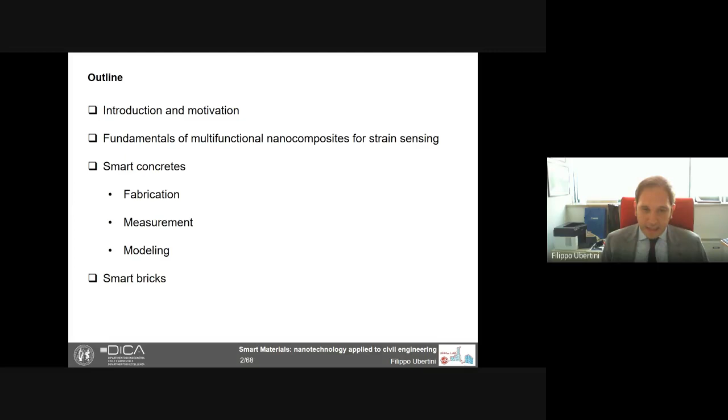So the motivation, of course, is that we all know that our structures and infrastructure are exposed to several hazards, including natural disasters, degradation, fatigue, collisions, and so on.

And what we all want to do as structural engineers is find ways of detecting criticalities well before they reach major failures or collapses. We want to get an effective way to do preventive maintenance and never reach the minimum acceptable threshold in terms of structural performance.

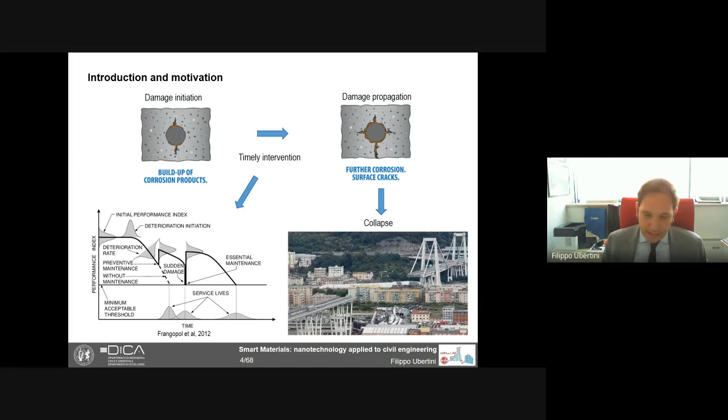So it's very important that we detect, locate, and quantify the criticalities well before any major collapse, as unfortunately happened even in recent times, including in Italy.

So there are about two approaches to do that. One is non-destructive evaluation, and the other one is SHM.

With my research group at University of Perugia in Italy, I would say that we are mostly working on the SHM framework, which means to acquire data continuously from a structure and then apply different techniques of data science to detect anomalies and possibly locate and quantify the criticality, and then have an efficient diagnosis, which means that we can take an engineering-based decision on what to do with our structure.

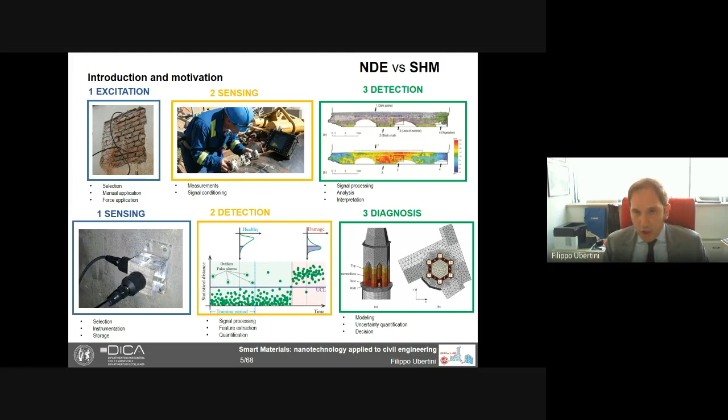But then in this field, we have some problems that we have to consider. With my research group, essentially, we have two research lines in SHM. One is the one I'm presenting you today, basically, that is related to the development of smart multifunctional structural materials.

And the other track is developing algorithms for SHM using more traditional sensors and working on the algorithms like doing vibration-based SHM, artificial intelligence, data science, and so forth. Today, I will talk about smart materials, as I've said.

So why do we need to include smart materials? Basically, because we have a big issue that sensors that we use in SHM, they do not measure damage. Damage is a change in material or geometric properties that adversely affects the structural performance, but of course, it's something that cannot be directly measured.

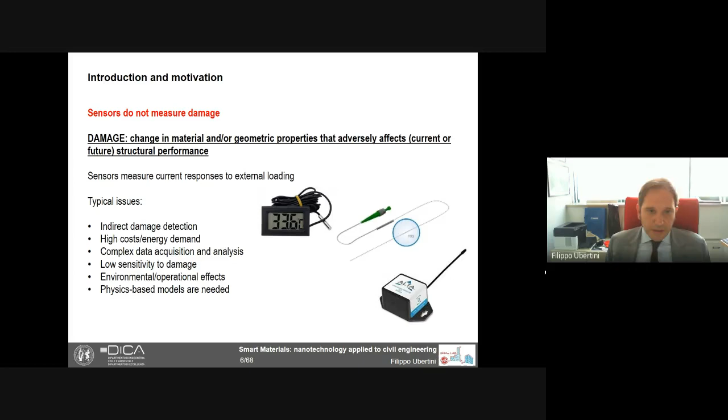Typical issues we have are also related to high costs, energy demand, complex data acquisition and analysis, environmental effects that have to be removed from the features that we use for damage identification, and then we need to include physics into our models for taking decisions.

So why multifunctional materials? Because what we want is defining structural materials that generate a more direct response to a damage. We want the material itself to alert when there is a damage. In doing it this way, the sensors of an SHM system are basically naturally integrated in the structure because the material itself becomes a sensor, a distributed sensor.

To do that, what we have to do is look at the micro or even the nanostructure of the material and engineer that structure in such a way to add novel functionalities and provide the material with an enhanced performance.

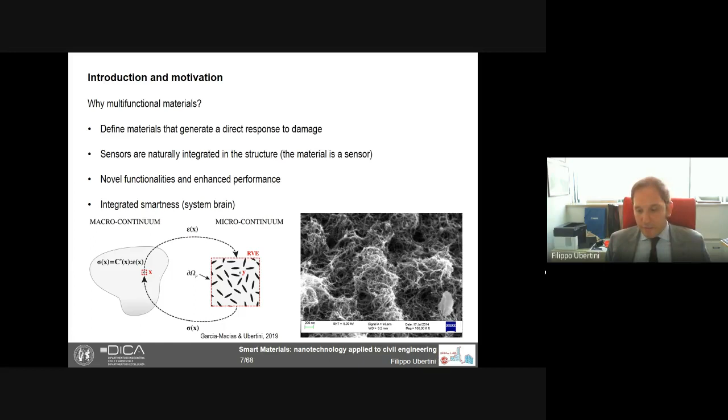An example of doing that is diluting conductive nanoinclusions or nanofibers into a non-conductive matrix, for example, using carbon nanotubes, as you see in the bottom right picture from SEM inspection, and as I will show you later on in the presentation. So a little bit of physics that we need to recall.

It's very simple. We just need to go back to the equation of monodimensional conductors to understand most of the work that I will show you. So basically, if we have a conductor, its electrical resistance is the resistivity of the material times the length divided by the cross section.

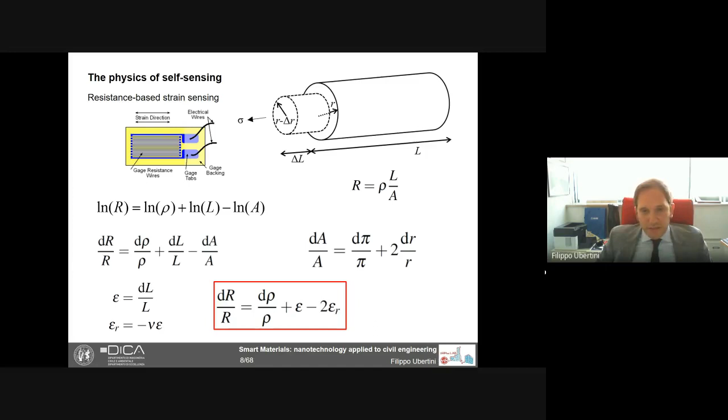If this conductor is under monodimensional stress and strain, we have a relative change in resistance that is basically the sum of the relative change in resistivity plus the axial strain minus twice the transverse strain.

If the material is a linear elastic material, then we can write this equation in the form that the relative change in resistance is actually proportional to the strain through the factor lambda, called the gauge factor, that is 1 plus 2 times the Poisson coefficient plus the relative change in resistivity per unit strain.

What happens typically in electric resistive strain gauges is that this last term is not very important. So typically electric strain gauges have a gauge factor of about 2.1, where if the Poisson coefficient is close to 0.5, it means the last term in the right-hand side of the equation is about 0.1.

The idea in piezoresistive materials, in smart materials that I will show you, is trying to maximize this last term associated with what's called the piezoresistive effect, and getting gauge factors much bigger than 2 or 2 point something, but that can reach values up to hundreds or even thousands.

How to do that is to create a conductive network of nano inclusions, nanofibers within the matrix, such that an applied strain produces a change in the interactions between the nanoparticles, which means a change in the overall resistivity of the material.

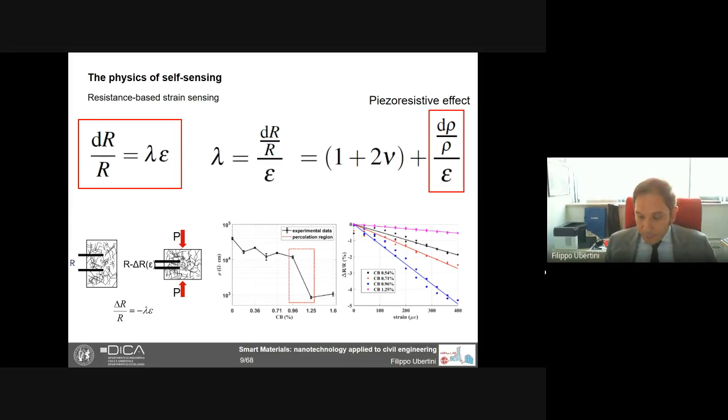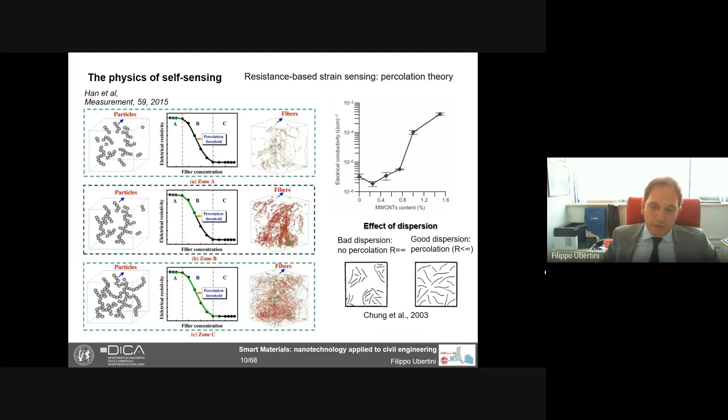What's very important to stress is also that we need a very good dispersion of the nanotubes if we want to achieve such percolation. This is very critical, as we will see later on.

So let's come to the focus of the work. Most of the things I will show you are referring to smart concretes.

What we call smart concretes are essentially cement-based materials that can be paste, mortar, or concrete, so with or without aggregates, that are made smart, strain sensing, self-sensing through the addition of different nano-inclusions. The work I will show you is referring to the use of multi-wall carbon nanotubes.

One big difficulty in dispersing nanotubes in concrete is that we need to disperse the nanotubes in water first, and then add cement and aggregate and so forth. To disperse the nanotubes in water, we need a lot of attention, and typically we need sonication and sometimes magnetic stirring. This, of course, is not suitable for large-scale production.

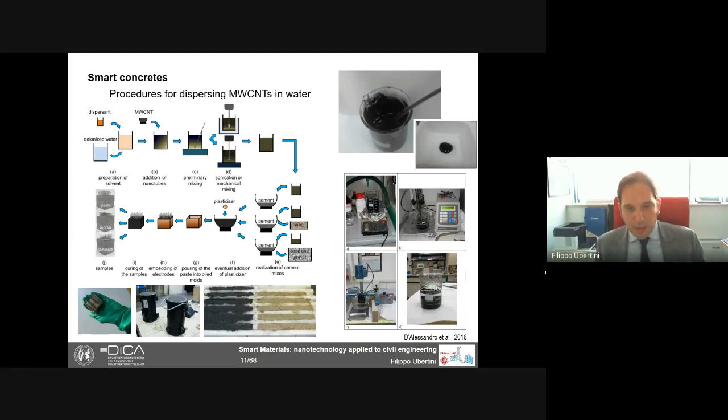Here you see some sketches, some figures from our lab, and note the difference in color between a plain cement paste and a cement paste that has just 1% of multi-wall carbon nanotubes with respect to the weight of cement. The change in color is quite strong.

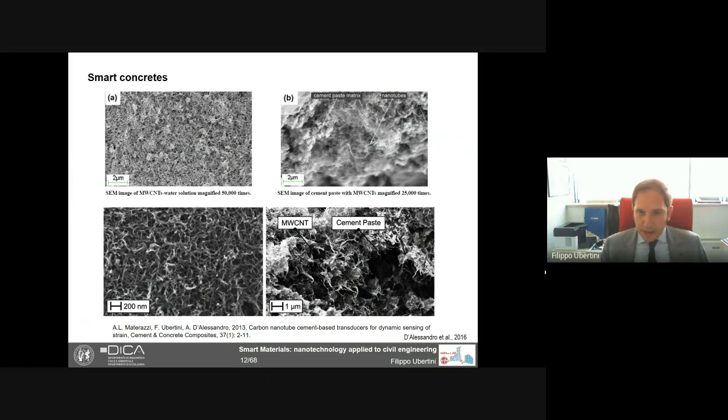Here you see some scanning electron microscopy images of nanotubes after dispersion in water, after water evaporation, as well as in the hardened cement matrix, where you see the nanotubes form this sort of very nice spider network that creates the conductive ways through the material.

The reason why we use multi-wall carbon nanotubes is because they have excellent mechanical and electrical properties. They have very high aspect ratios, and they have a small size. Essentially, nanotubes are cylinders of carbon atoms, one inside the other.

The multi-wall carbon nanotubes we use have a cost that is absolutely compatible with an application in civil engineering. Of course, not in large amounts, but in small amounts, in critical situations and critical locations of a structure, the cost is compatible and competitive with that of a traditional sensor.

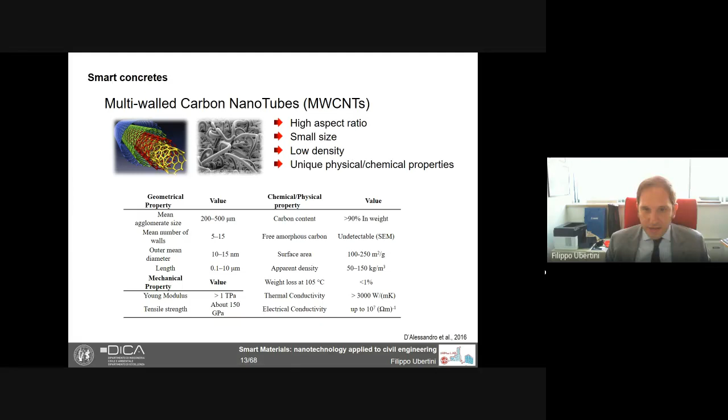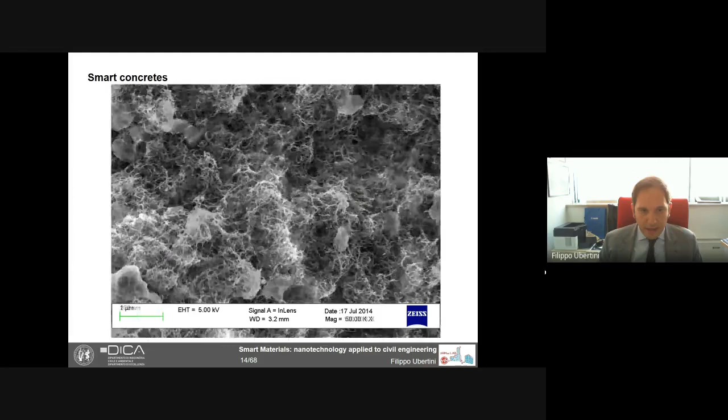Here you see some of the properties of the nanotubes, where I point your attention to the very high tensile strength and the very high electrical conductivity. Here you see some pictures of nanotubes at increasing magnification, where at the bottom left you have the dimension scale, giving you a feeling of how small these very thin wires of carbon atoms are.

So let's go to measurements. To measure the electrical resistivity of smart concretes, from the literature we have two approaches: the two-probe method and the four-probe method. Both are direct current approaches.

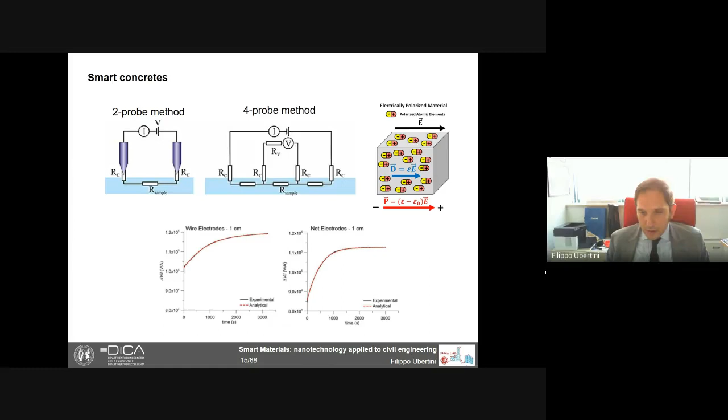Of course, the alternative is to do AC, alternating current, but then we cannot really go to multi-channel reading. So one main contribution we made in the work by Downey and co-authors was proposing a biphasic direct current measurement that keeps the advantages of DC but removes the polarization issue, so we can do multi-channel reading without any polarization problem.

The way we do this is by applying the voltage input in the form of a square wave, with plus or minus, for example, 2.5 volts in a single period of the square wave. Then for every period of the square wave, we just take one sample, one reading.

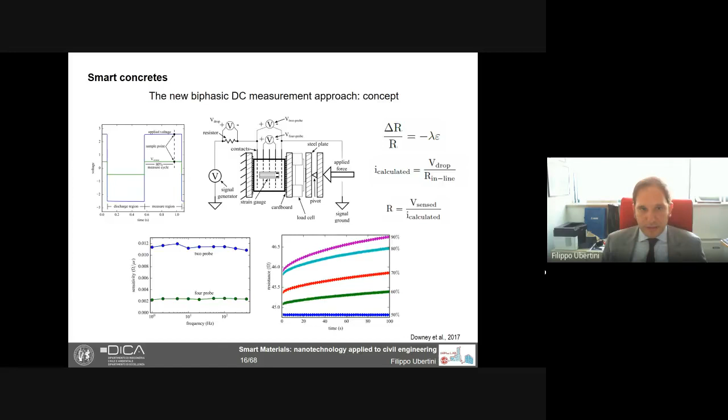So we know how to fabricate these materials, and we know how to measure them. Now let's see what happens if we apply a strain.

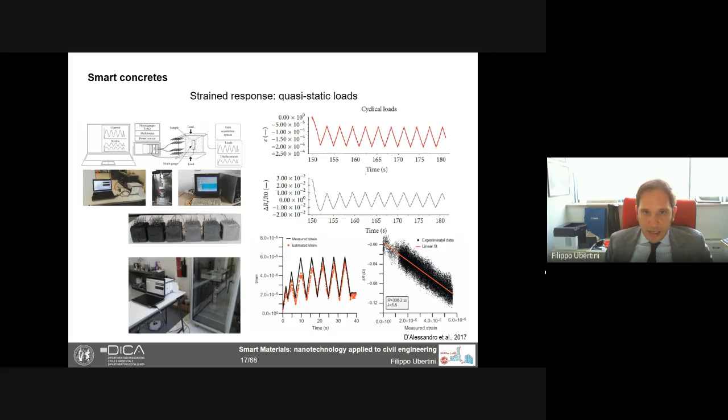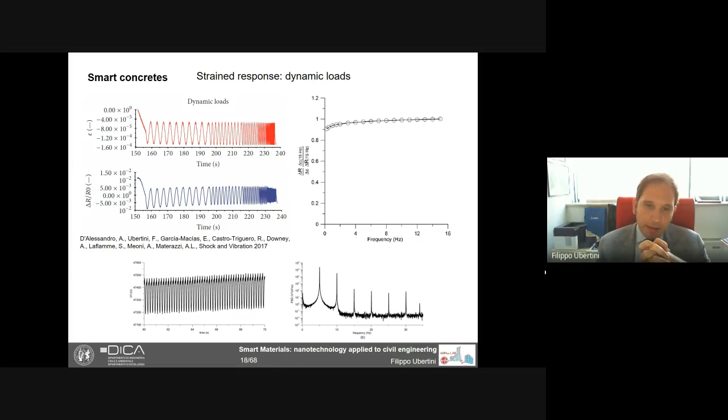Another notable aspect of these sensors is that the response to a harmonic mechanical load is periodic, but not harmonic—it has superharmonic components, as you see in the bottom right diagram of this slide. This, of course, is a drawback of these sensors that we will discuss later on.

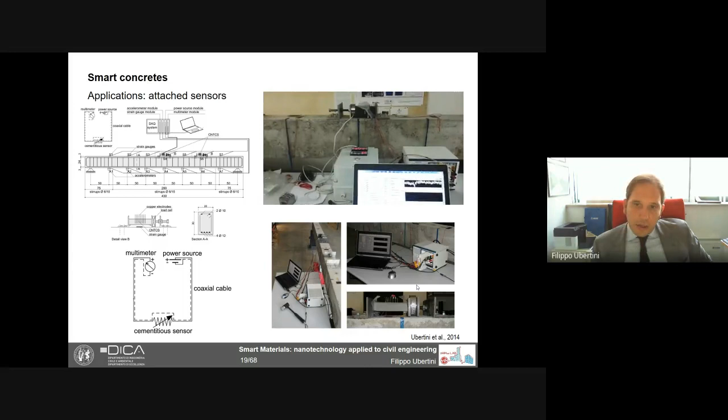Okay, let's go and analyze this signal. Actually, the video you have seen was not referring to the sensor we used for the paper, but in any case, it was very similar.

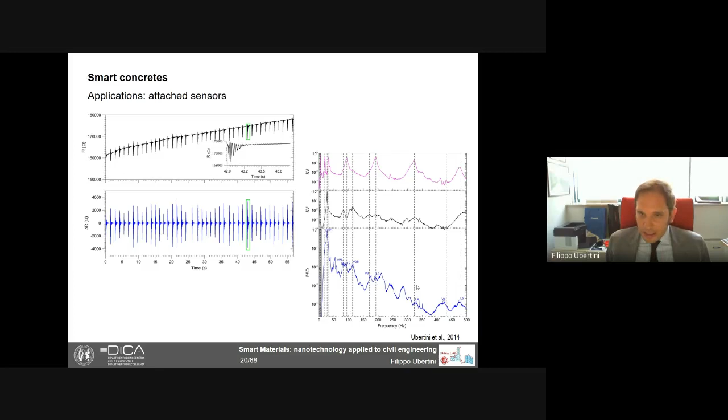But then if you compare the power spectral density of the blue signal in the bottom right image with respect to the singular values of the accelerometers attached onto the beam - with purple the lateral accelerometers, and with black line the vertical accelerometers - you see that all vertical peaks present in the singular value plot of the accelerometers are also present in the power spectrum of the smart sensor, the cement-based sensors with nanotubes. So what we get here, and the first leading mode is quite evident, is that using these sensors we can actually identify natural frequencies of structures.

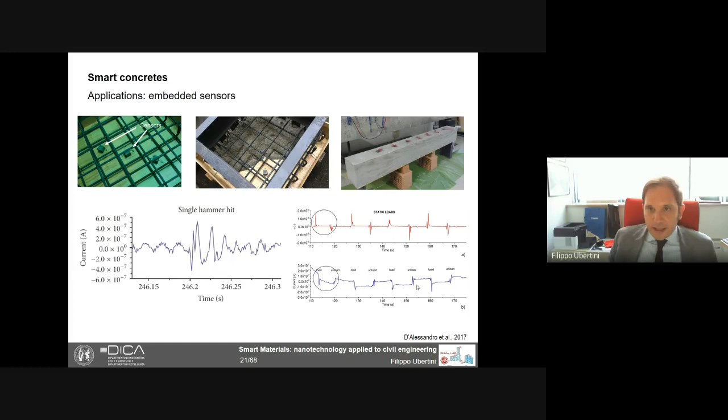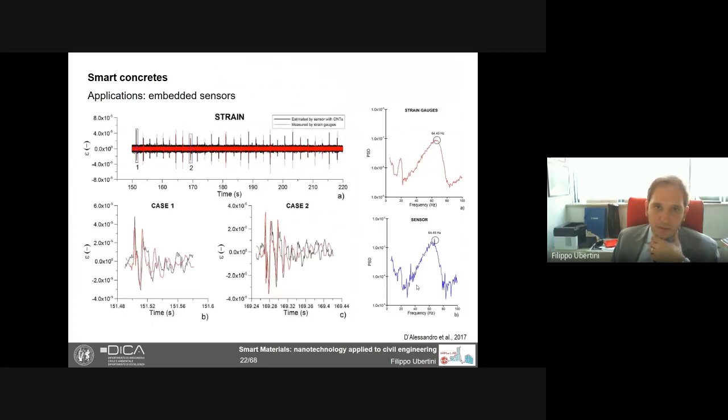If we do dynamic measurements with the hammer, we get a good agreement between the sensor in black and the strain gauges in red, and we can verify that the leading peak of the first mode is actually well detected by the smart sensors. All these papers are cited in these slides, and most of them are with Dr. D'Alessandro as the main author.

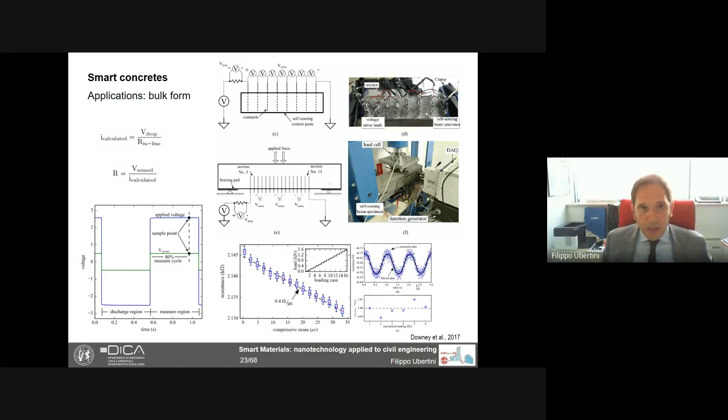Here you see the results from the specimen on the top left, in terms of resistance along the specimen, shown by the blue line in the bottom left image. The two outer contacts have larger resistance, but that's because of boundary conditions in the diffusion problem of the electrical problem. In the internal electrodes, we more or less have the same resistance, so the material is more or less homogeneous, and these values do not change in time unless there is damage or something like this.

So here instead you see the results of the application to the beam. Going back to the previous slide, you see on the right there is a beam with reinforcement, only longitudinal reinforcement, no shear reinforcement, and this beam is fully made of cement paste with nanotubes. We have electrodes all through the beam, and the beam is simply supported. We do something in between a 4-point bending and a 3-point bending test, let's say it's a 3-point bending test.

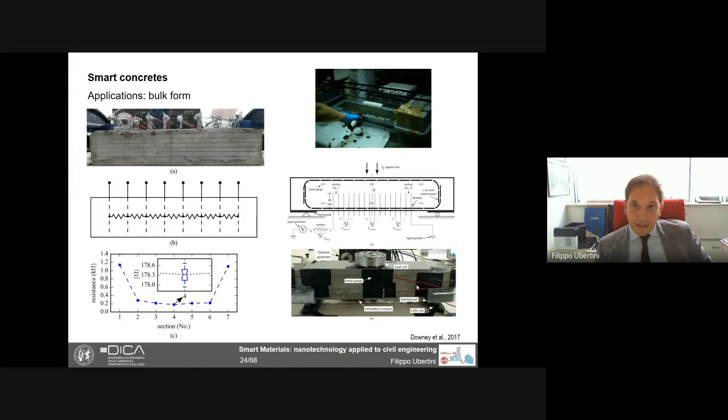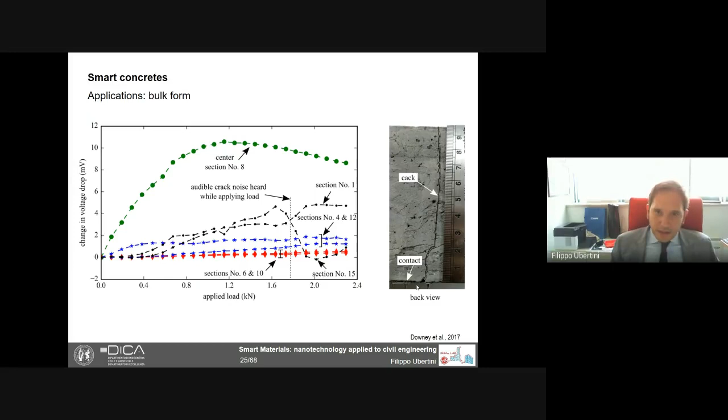The third thing you should notice is that at a certain point, around 1.6 kilonewton, there was a shear crack forming out of the electrodes. Section number 1 and section number 15 show opposite behavior—one was increasing in voltage drop, the other decreasing. For sure we have some bifurcation, some dramatic change in the electrical behavior of this section, and we will see later that this is actually associated with the damage, which we can predict with a numerical simulation.

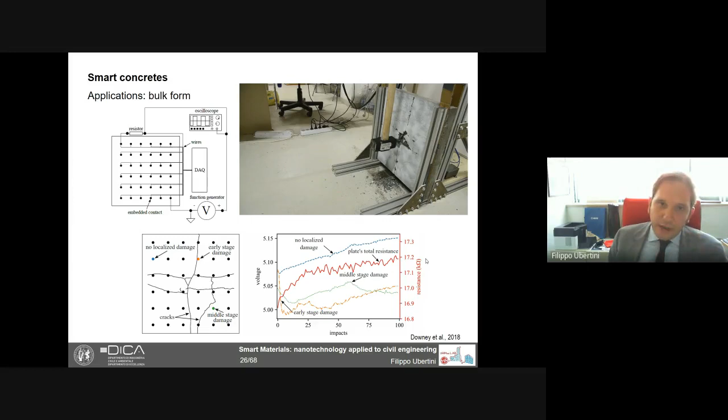The same type of application is the one we have made to this plate—a bidimensional plate of cement paste with nanotubes that we have subjected to a series of impacts that generated progressive damage. In the video, the damage was already huge, but at the beginning the plate was in sound conditions. We placed a lot of electrodes on the other side of the plate and measured the voltage drops across all pairs of electrodes.

If you look at the results in the bottom right, you see in red the increase in total resistance of the plate as a function of the number of impacts—so it increases as we expect with the number of impacts. If you look at the orange line, there is a big change in trend at an early stage, for a small number of impacts. In fact, this line refers to a contact electrode close to an early-stage damage.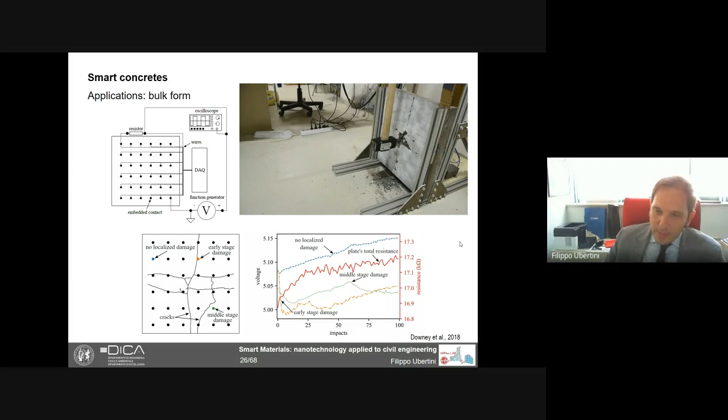The green line shows a change in slope around 60 impacts, the middle stage, and in fact this electrode is located close to a middle-stage damage. The blue line refers to a location with no localized damage, and here we have a nice increase in resistance with increasing number of impacts. So what we can say is that we have some change in the conductivity of the material due to the damage, which we can somehow measure.

Let's come to modeling, because if we really want to understand what's going on and exploit the properties of these incredible materials for SHM, we need to be able to describe their behavior. I will propose essentially two or three techniques for modeling the behavior of these composites. The first one, and perhaps the most powerful, is based on a micromechanics approach. This is a series of papers that we have published together with Dr. Garcia Macias from my group.

He's a postdoc in my group, but also right now assistant professor at University of Granada in Spain. He's a real expert in micromechanics.

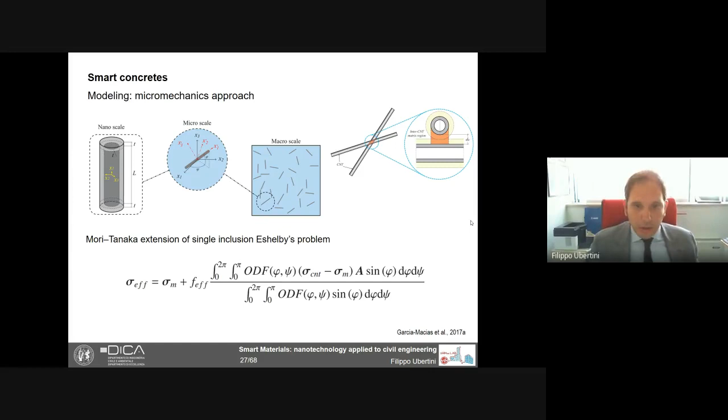What's very important is that when we do this averaging, we have to consider the orientation of the nanotubes. So we do a volume average of the properties of the nanotubes, considering their orientation distribution function, the ODF. If we disperse the nanotubes randomly, this ODF is just 1 in all directions, because we have the same probability of the nanotubes being oriented in any direction. But if the material is strained, for instance under compression, the nanotubes will tend to align in a certain direction, so the orientation distribution function will change.

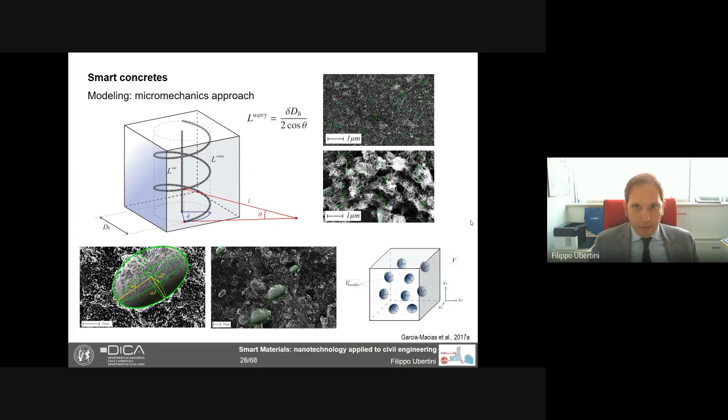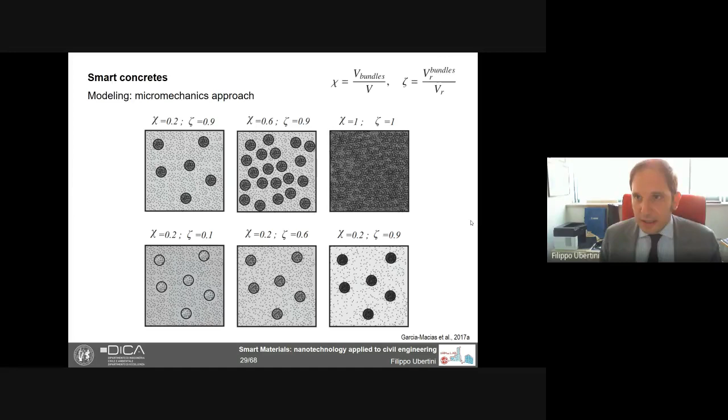What we've also introduced in this framework is the evidence from our experiments that the nanotubes are not straight - they're twisted and bent. So we introduced these wavy nanotubes. Also, whatever effort we make to distribute them uniformly in the composite, we still get agglomerations and bundles - ellipsoids in the matrix that we have to consider. We've modeled these agglomerations through the factors chi and zeta, related to the relative volume of the bundles with respect to the total volume, and the relative amount of agglomerated nanotubes with respect to the whole nanotube content.

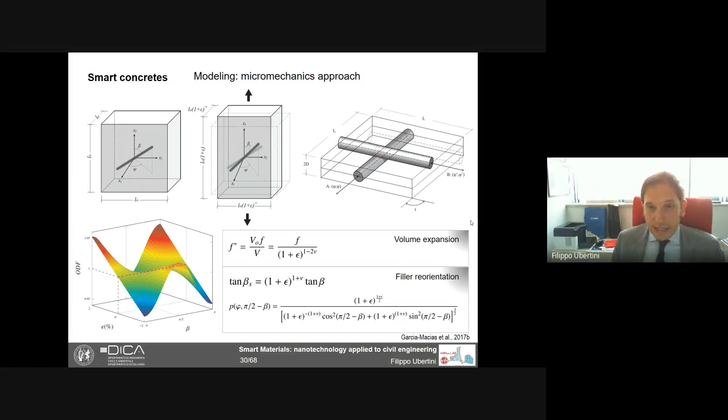Then how do we consider the effects of strain? When there is a strain, there is a change in volume, and so a change in the volume fraction of the nanotubes, because the overall composite volume changes due to a change in the matrix volume - but the nanotubes themselves don't really change volume. Then there's also the reorientation of the fillers, which we can analytically model.

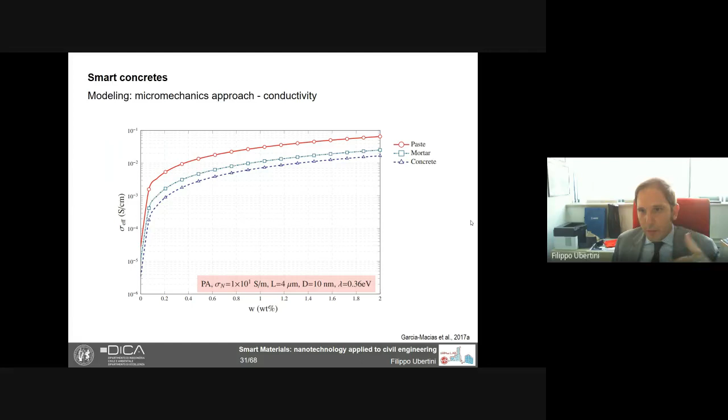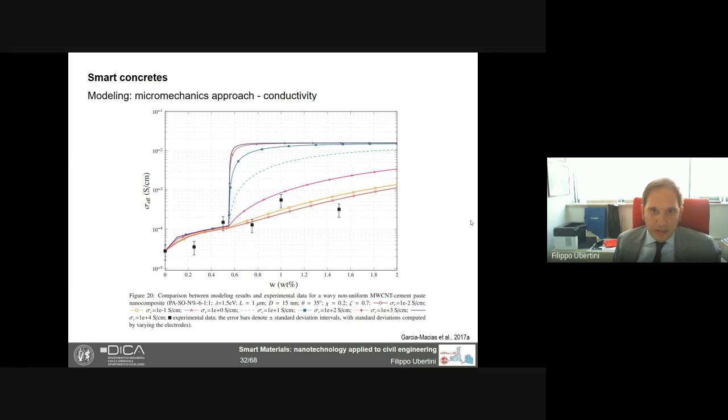To really get close to the experiments, as you see in these results, we need to add the bundles as well. If we add the bundle parameters, we can really interpret the behavior of this composite. That was our result in a paper by Garcia Macias and co-authors in 2017, systematically demonstrated for cement paste, mortar, and concrete.

So it's very important to stay at the percolation threshold, and if I may say, to stay a little bit over percolation, to have a material that is more robust with respect to imperfect distributions of the nanotubes in the matrix.

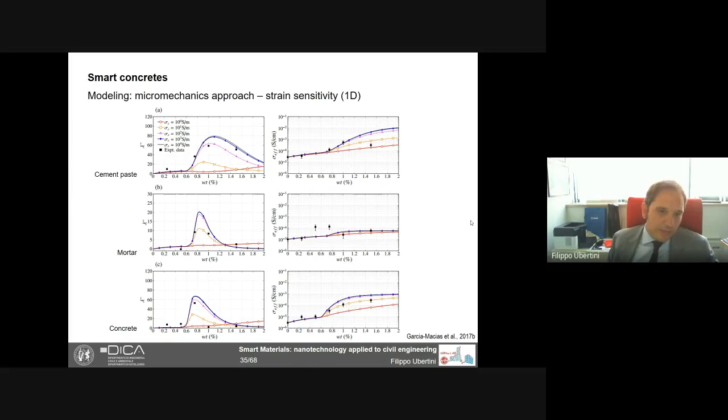This framework was also extended to three-dimensional stresses and strains through a mixed micromechanics analytic approach and a numerical finite element simulation. This was also in a paper with Dr. Garcia Macias as main author in 2018.

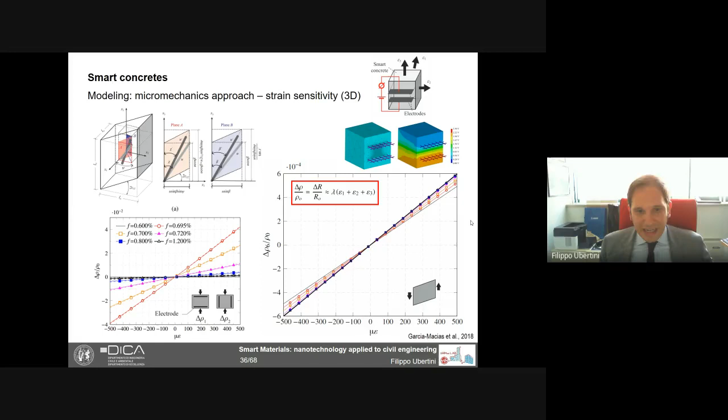What we got from this study was that shear strain does not really produce big changes in resistivity. Instead, the material is sensitive to change in volume. So basically, it's sensitive to linear strains, but regardless of their direction, what we get is a sensitivity to volume changes, regardless of how we distribute the electrodes.

Another approach we have proposed for modeling the behavior of these sensors is by doing lumped circuits. Here, lumped circuits means we want to reproduce the behavior of these sensors by using resistors and capacitors in series and parallel, so equivalent circuits.

These are very good if we want to reproduce the dynamic response of these materials, like when we do vibration measurements. Because for the overall properties, micromechanics is better, but for dynamics, we need to add time into the problem. The best way we found to do this was with equivalent circuits.

We started this with Dr. D'Alessandro from my group, who was a PhD student. She got her PhD in these smart materials studies, and she continued working on this within my group up to now. At that time, I think it was 2014, we proposed a first paper where we modeled these cubes with a resistor plus a capacitor and a resistor in parallel.

This model is very nice because it can reproduce the polarization pretty well, as you see in the bottom left. It can reproduce the presence of superharmonics in the response to a sinusoidal mechanical load, which can be seen by analytic derivation through manipulating the differential equation that governs the circuit. That is a linear differential equation, but with time-varying coefficients.

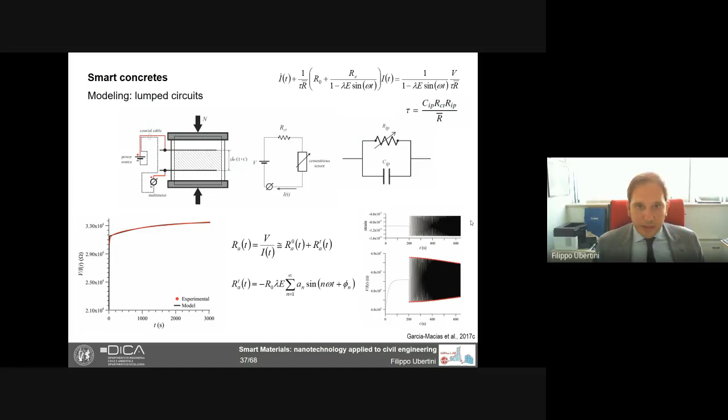But what we could not reproduce was the increasing frequency response function with increasing frequency. So a few years later, with Dr. Garcia, in another collaborative paper with the rest of the group as co-authors, we proposed an enhancement of the previous model, where we noticed something new.

We noticed that these materials, besides having a very strong piezoresistive behavior, also have a little bit of piezoelectric capability. If we look at the specimens and apply a load, we see a change in voltage. The material outputs a voltage change without any external input, meaning the material is a little bit piezoelectric.

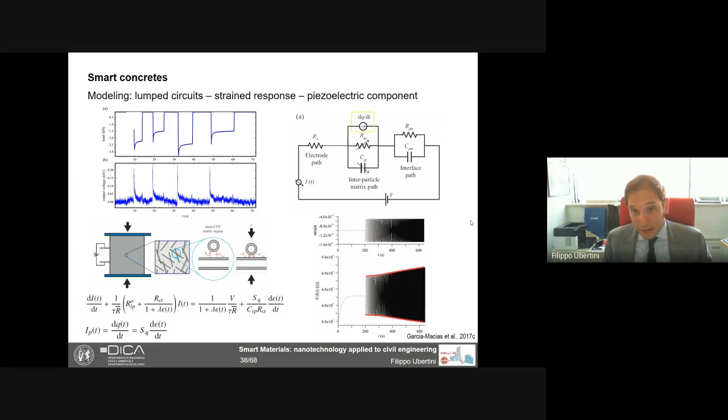So even though it's a small piezoelectric effect, it's enough to modulate the frequency response function of these sensors and produce increasing frequency response functions. We have shown quantitatively that this model outperforms the previous one, is more accurate in reproducing the response to a variety of loads, and is more accurate in terms of frequency response functions.

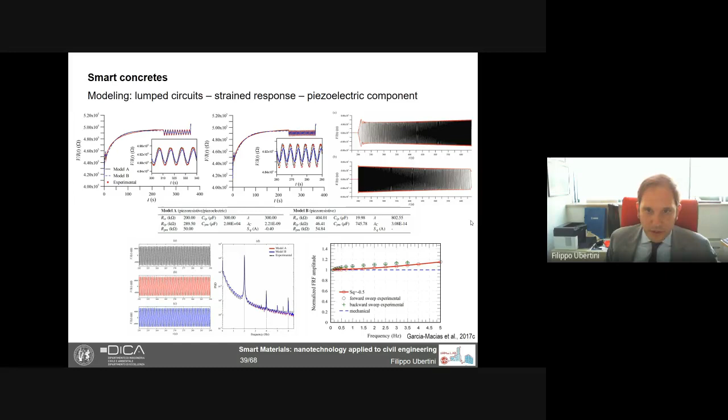The last modeling method I want to show you is based on resistor meshes. It's kind of a lumped circuit approach. We reproduce the conductivity of the material through a mesh of resistors. This was work done with Downey and co-authors.

Downey, Austin Downey, was at that time a postdoc in the group of Professor Simon Laflamme from Iowa State University, a great collaborator we're working a lot with on these topics. He was visiting my lab for some months, and we did quite nice research results.

We take a weighted average between the mean absolute error and the maximum deviation, and we try to minimize this cost function. This is how we get the values of the resistors. Why is this interesting?

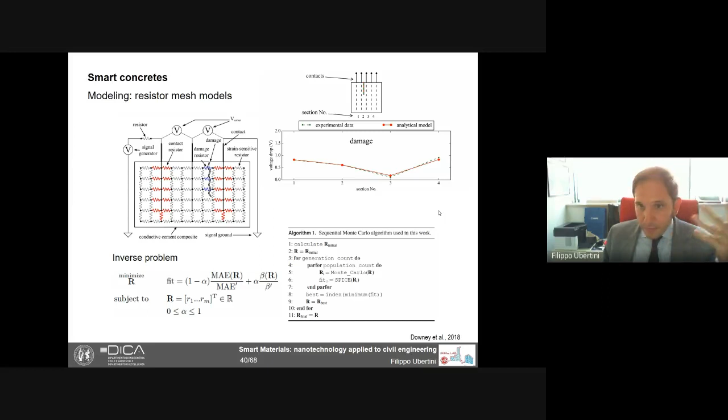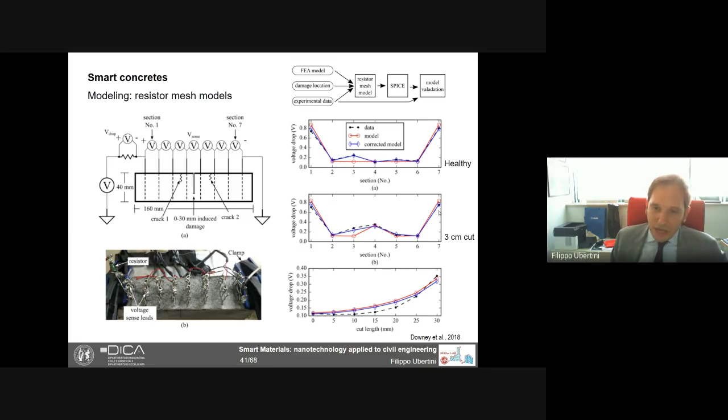There is not a perfect match, but there is clearly evidence of consistent behavior between model and experiment. When there is a crack, the two curves that before were overlapped undergo a sort of bifurcation: one goes up and the other goes down, and the same is predicted by the model. So we can say we have something we can use for detecting and locating a damage, and also for progressively tracking its severity.

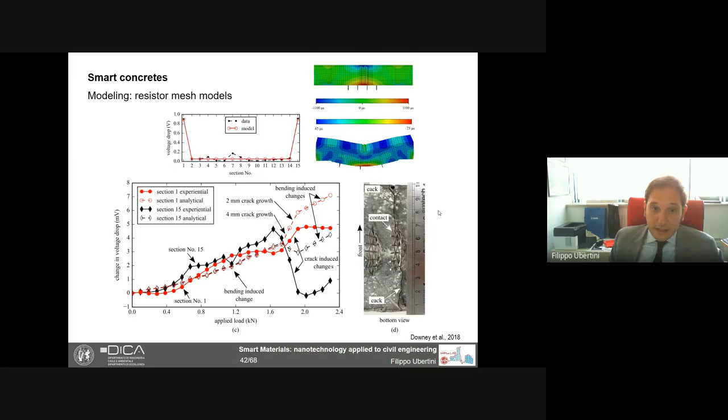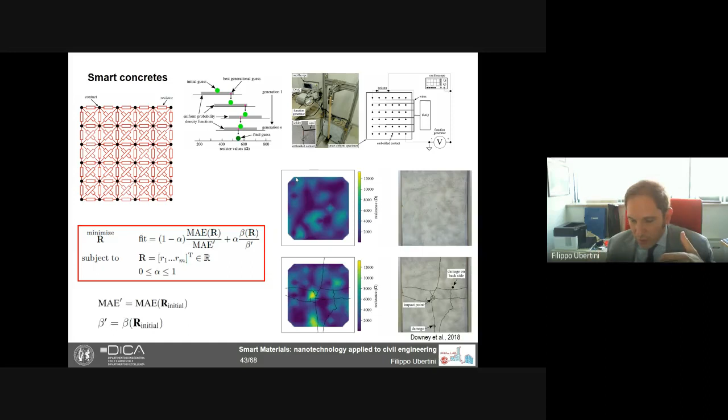Then we have the damaged plate, where we apply the calibration and optimization procedure, fit the inverse problem, and get the map shown at the bottom. You clearly see yellow spots in the middle and at the bottom middle, where we have the most prominent damages—some detachment of material. We may not fully follow the cracks, but we do follow where there is material detachment. Taking the difference between the map after damaging and before damaging makes this even more evident.

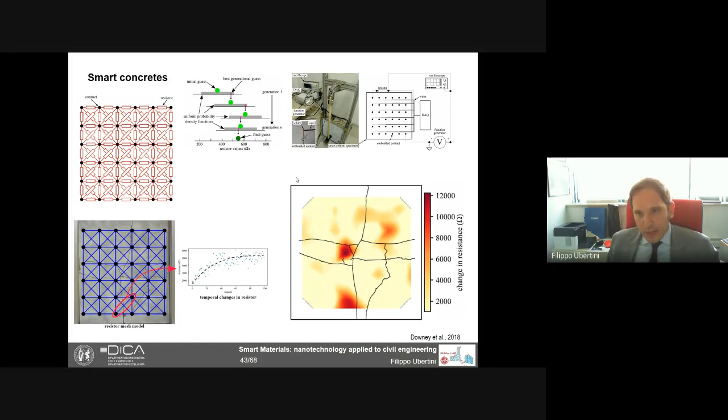All right, the second part of the presentation, which I expect to be shorter, is about the use of smart bricks.

So the idea a few years ago with some colleagues in my group was: why don't we apply the same concept of smart concretes to the field of masonry? We came out with this idea of smart bricks. A smart brick essentially is a clay brick that has piezoresistive properties, so it can work as a strain sensor within the masonry.

The idea is to use this by doing static measurements, not vibration measurements. What we want to do is take measurements from smart bricks periodically, and if there is an earthquake, compare the post-earthquake with the pre-earthquake conditions. Of course, we can do this automatically. We expect that if there is an earthquake, cracks form in the structure, which means the loads change their path from the top to the foundations.

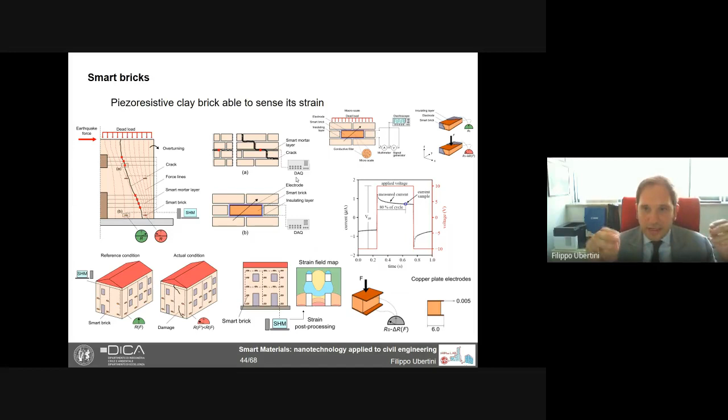So under dead loads, we will have changes in permanent strain within different portions of the structure. We can construct a map of the strain field, construct a map of the change in the strain field, and see where most changes are located — that could be the location of the damage. We could use this to extract features to detect, locate, and quantify the damage. This is more or less the idea.

Regarding the approach, in theory it's the same, but in practice it's much more difficult to have a smart brick, because the brick burns. In the fabrication process it goes up to more than 900 Celsius degrees. So for sure we could not use carbon-based inclusions unless we do very special treatments that are expensive.

One possibility we proposed was to use titanium dioxide — even if these are not really conductive particles, and by the way they are spheroidal, so not ideal for percolation — they could still enhance the piezoresistivity of the material. But the best results we got were with micro steel fibers made of a special alloy that keeps very high electrical conductivity even after burning in an oven.

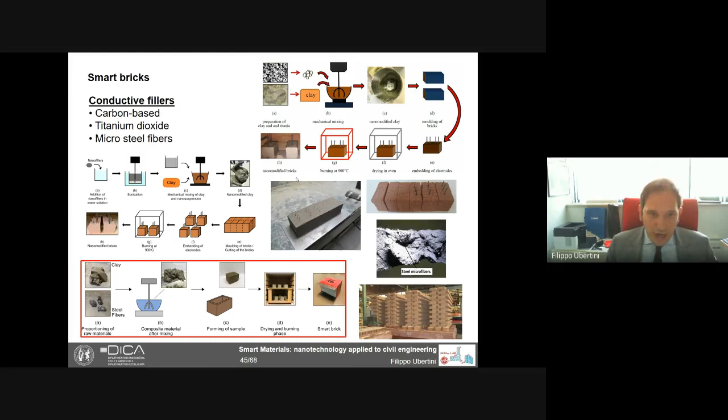And this is how we fabricate the smart bricks. As a matter of fact, these smart bricks have a very nice percolating behavior. You see here we go from 1 times 10 to the minus 9 to about 1 times 10 to the minus 3 Siemens per centimeter in terms of conductivity, with an amount of microfibers that goes from 0 to 5% with respect to the weight of the clay before burning. So a very nice percolation.

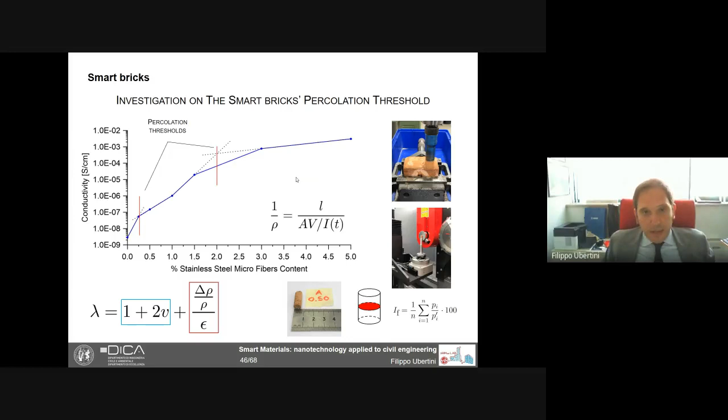By the way, there is a double percolation, because there is a percolation at around 0.25% and another one around 2%. If we look at the microstructure of these materials, for instance through scanning X-ray tomography — these scans were made at the Technical University of Braunschweig in the framework of a collaboration we have with the group of Professor De Lorenzis.

We saw that actually the microstructure is quite complicated. We have microporosity, we have microcracks, we have iron particles and other metals dispersed in the matrix besides the fiber. This may justify the double percolation, even if it's something we have not yet studied in detail.

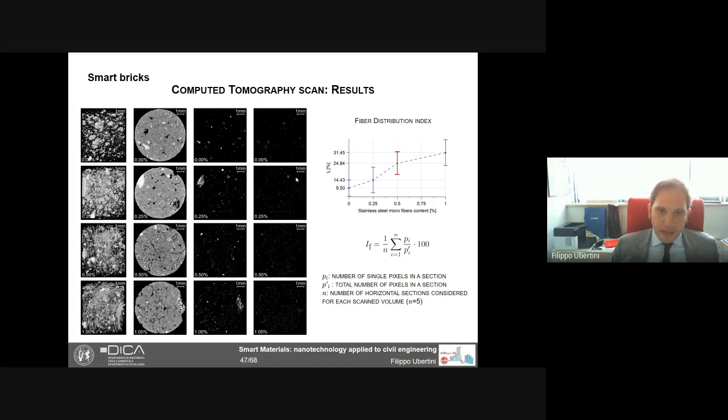By the way, these kinds of tomographies are very useful to ensure that the fibers are well dispersed, and we also compute a dispersion index to be sure that the composite is made properly.

In terms of modeling these bricks, we have proposed a model that is a series of resistors, because we have some contact resistance that is also sensing — the contact here is the plate electrode, typically made of copper. Of course, this is going to be sensitive to the load, especially at low compression stresses. Then we also have the internal change in resistance due to the piezoresistivity.

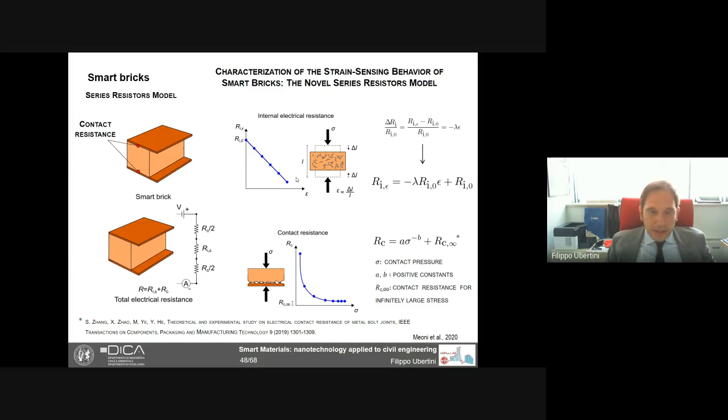So we have a model that accounts for the two phenomena through a series of resistors. This model shows from the experiments that below 1.5 megapascal of compression, the sensing capability of the sensor is governed by the contact, while above 1.5 megapascal it's governed by the internal piezoresistivity. By the way, this model fits the experimental results very well and shows very consistent strain measurements compared to what we measure with strain gauges.

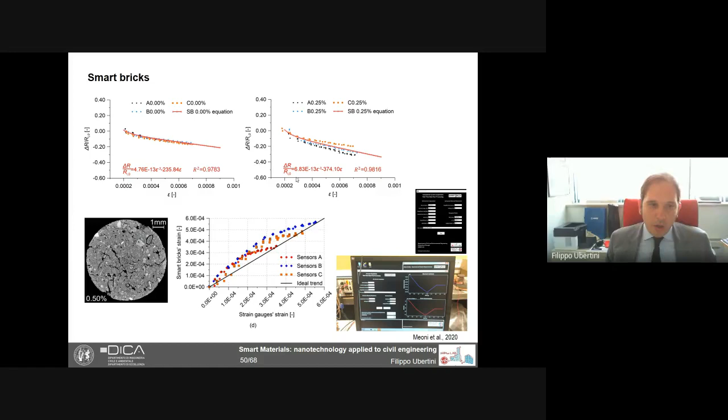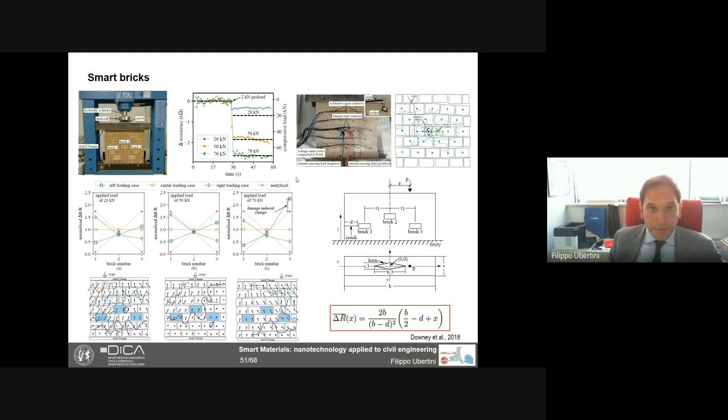To go more into this, recently with the work of Mr. Meoni, a PhD student from my group, we are moving towards the use of smart bricks to build a dense sensor network—a larger number of smart bricks within a masonry structure.

We reconstruct the strain field through an interpolation procedure using kriging, a stochastic interpolator that's very interesting from several perspectives. Then we do damage localization through the definition of different features that essentially look for locations where the strain has large gradients, which means that probably there is a crack there. That's why there is a relaxation of the material around the crack, and that's why there are gradients of strain there. In this way, we try to locate damages.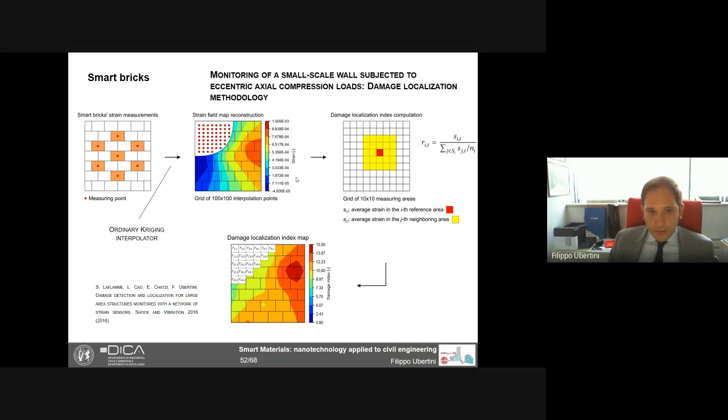These features for locating damages were proposed in a different context in a work by Professor Laflamme and co-authors, where I was also a co-author in a different context. Here you see an experiment of this type of approach applied to a wall under in-plane loading.

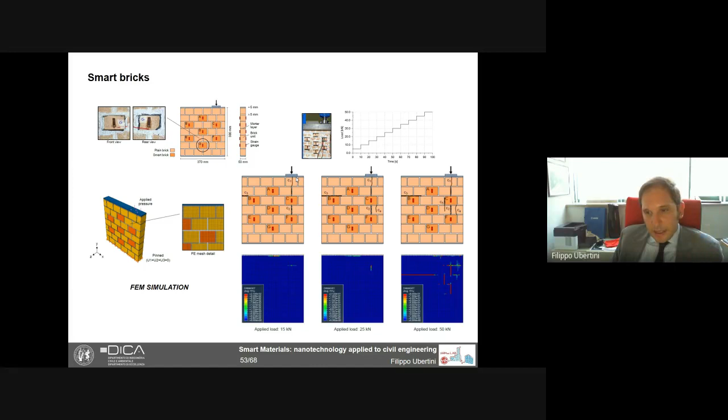We apply the load on the right side of the wall in an eccentric position, and we induce some damage. In this slide, you see a comparison between the real damage—real cracks C1, C2, and C3—observed on the structure at different loads: 15, 25, and 50 kilonewton. Below, you have a numerical simulation that resembles the experiments very well using a micromechanics approach.

If you look at the strain field from the numerical model, you will see these are the strains at the different load intensities. Then we interpolate the strains from the smart bricks, and with the kriging interpolator we get a map like this, which makes pretty much sense with respect to the finite element map.

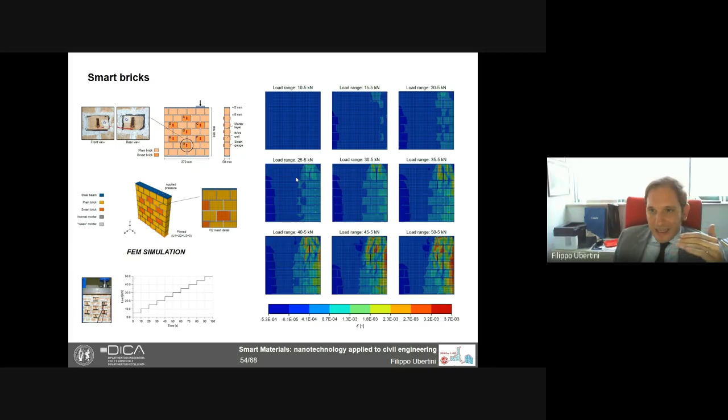Of course, with the smart bricks, we have an averaging of the strain between mortar and bricks, because we are measuring the strain of the bricks and then averaging it. With the FEM simulation, the strain is different between the units—the bricks and the mortar. But still, we can say there is high consistency between this map and this map.

If we do the same with the strain gauges attached to the smart bricks, we get maps that do not really make much sense—the strain is much more localized than in reality. Let's say if we take the finite element simulation as a replica of reality, this is due to the fact that the strain gauges are very local in the measurement they provide.

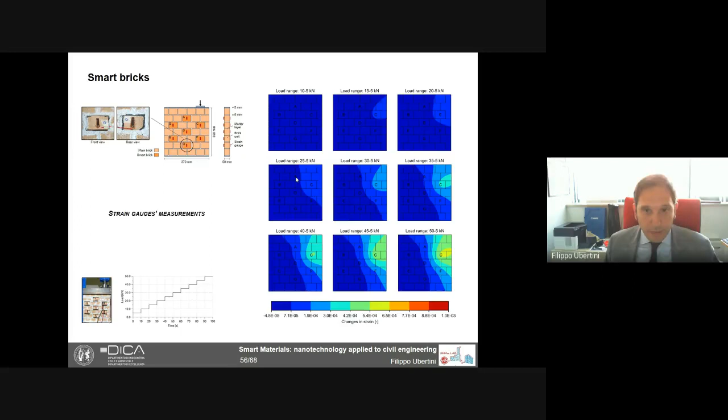If we apply this damage-locating feature, you see that with the smart bricks, we are effectively locating crack C1 and C2 when they are forming and progressing around 25 kilonewtons. The only crack we cannot really detect is crack C3, which is a flexural crack, but this is very unlikely to develop in a real structure.

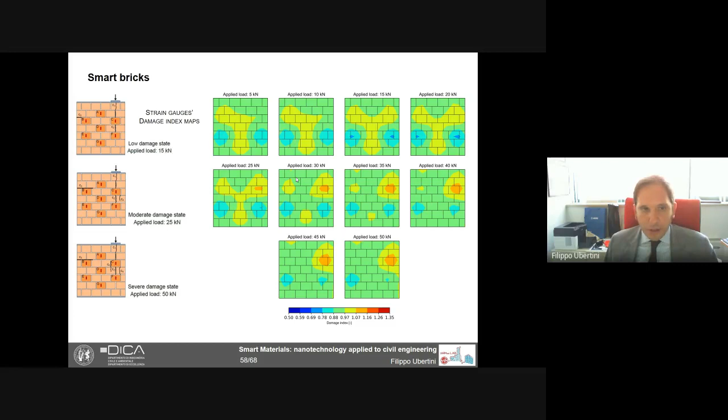If we do the same with the strain gauges, the location of the damage is much more challenging, and perhaps only at 25 kilonewton we can say that something is going on in the region where we have cracks C2, C1, and C3.

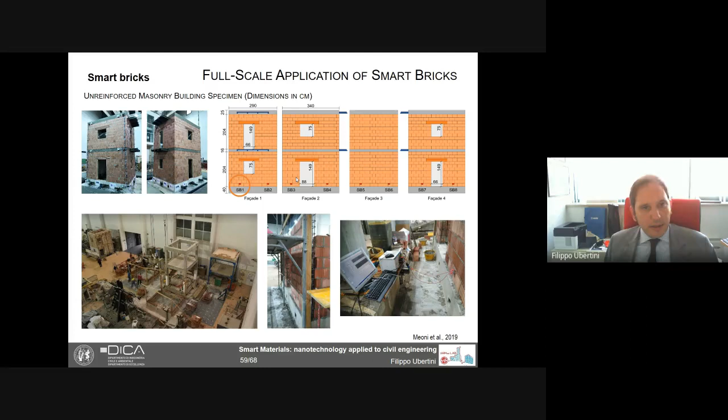Another interesting experiment that will go very quickly here was on this building, testing on a shaking table with some smart bricks at the base. The measurement is the same as you have seen.

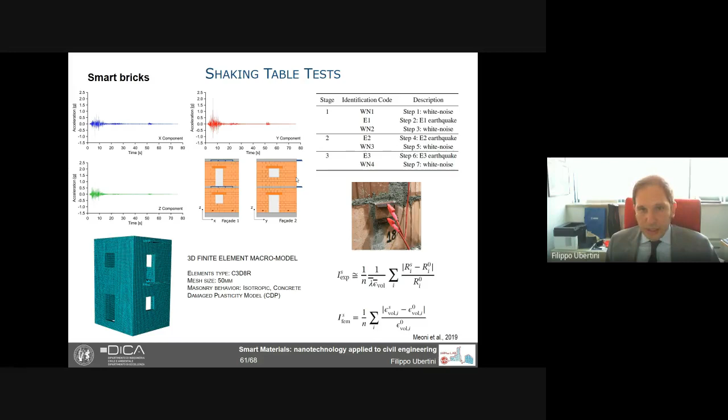We have done numerical simulation, and we have defined a sort of damage index that considers the absolute relative change in strain that we have at a single brick and in the total bricks with respect to the undamaged situation.

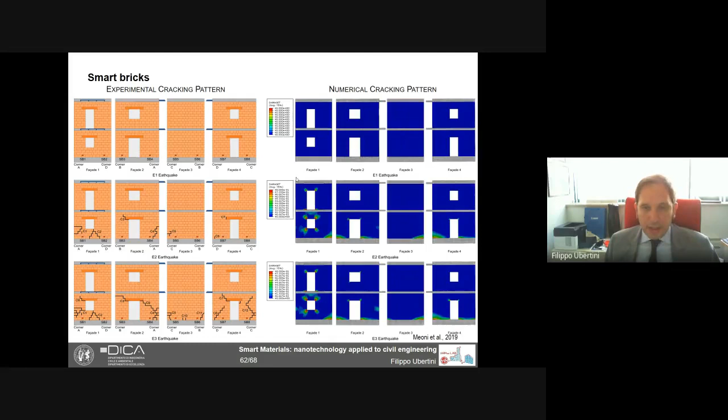Here you see the real damages after different earthquakes from the shaking table. On the right, you see the simulation that is somehow satisfactorily consistent with the experiments.

Here you see a comparison between the real damage, in gray color: undamaged is white, negligible to slight damage is light gray, moderate damage is moderate gray, substantial damage that, however, is far from the ultimate limit state condition. I have to say we never reached collapse here, we do not even get close to collapse, is darker gray.

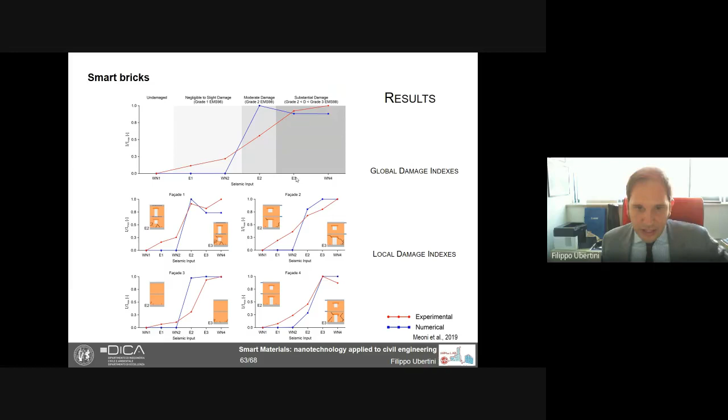You see with the red line, as a function of the different seismic inputs, what we get from the experiments in terms of damage index. And in blue, what we get from the numerical simulation. So you clearly see that we have an index based on the output of smart bricks that can give us a quite nice ability to track the intensity of the damage. At least we can say, yes, there is damage, and yes, the damage has progressed, or no, the damage has not progressed after an earthquake.

So let me conclude this talk by saying that nanocomposite materials such as smart concretes with multi-wall carbon nanotubes and smart bricks with steel microfibers are very attractive materials for the future of structural engineering. They can sense the strain, and they can allow damage detection and localization. It's very critical to disperse the nano or micro filler in the proper way, because otherwise we do not reach the percolation and we lose what we are looking for.

To model the behavior of these materials, typically you need to apply different approaches, from micromechanics to lumped circuits, to resistor mesh models, to series resistor models, and so on. But with these modeling approaches, you can really understand what's going on and have an effective processing of the data towards an effective SHM.

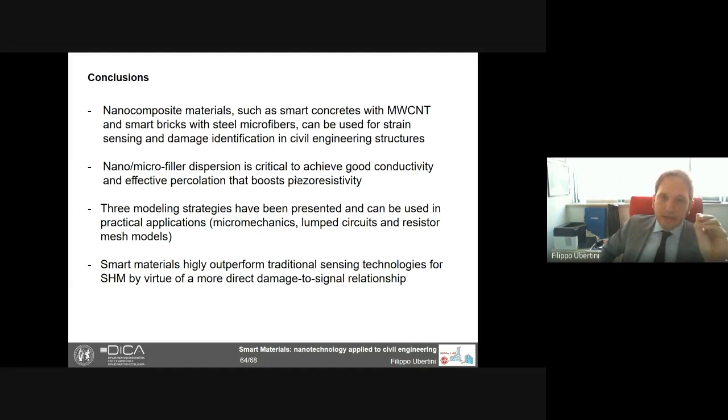So in these last experiments, I hope I have convinced you that these smart materials can highly outperform traditional sensing technologies like resistive strain gauges, because these materials have a more direct damage-to-signal relationship, which, if you recall, was the initial purpose I stated in the introduction of this work.

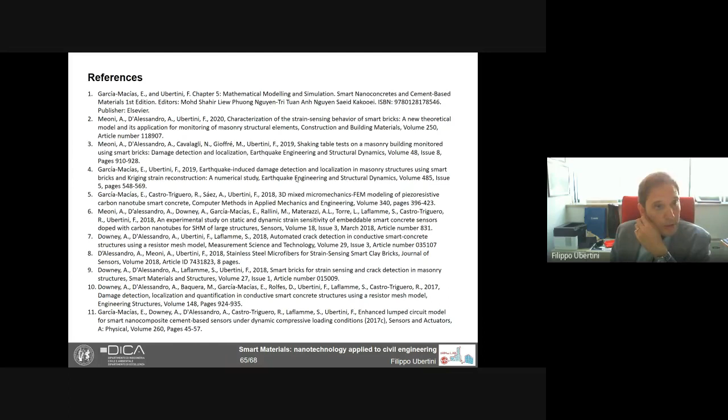A little bit of references from our group. Of course, this is the result of a lot of collaborative papers. For reasons of time, I couldn't mention some of these papers, but they are all here.

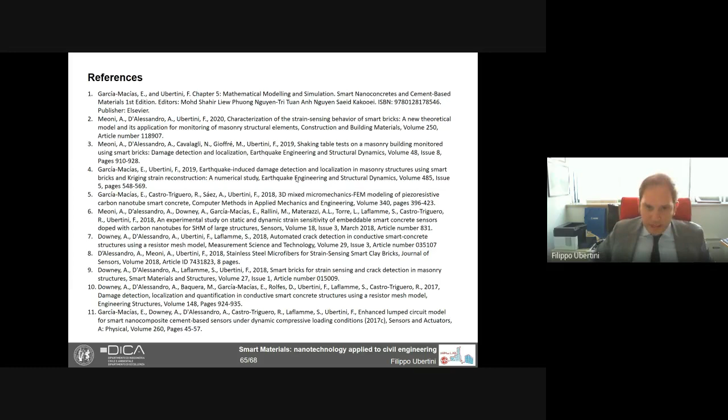Again, this is a collaborative work, so I have to acknowledge the part of the group that is the Structural Health Monitoring and Earthquake Engineering Lab at University of Perugia, and the part of my group devoted to smart materials: Dr. Antonella D'Alessandro, Dr. Enrique Garcia Macias, Mr. Andrea Meoni, and Mr. Borke Birgin, who is also working in this field, developing a Marie Curie PhD thesis on smart pavements.

Today, I didn't have enough time to show you how to bring this concept into the smart pavement field, but maybe this will be for next time.

Let me also acknowledge Professor Laflamme from Iowa State University, a great collaborator and colleague, and at that time his postdoc, Dr. Austin Downey, now an assistant professor in the USA.